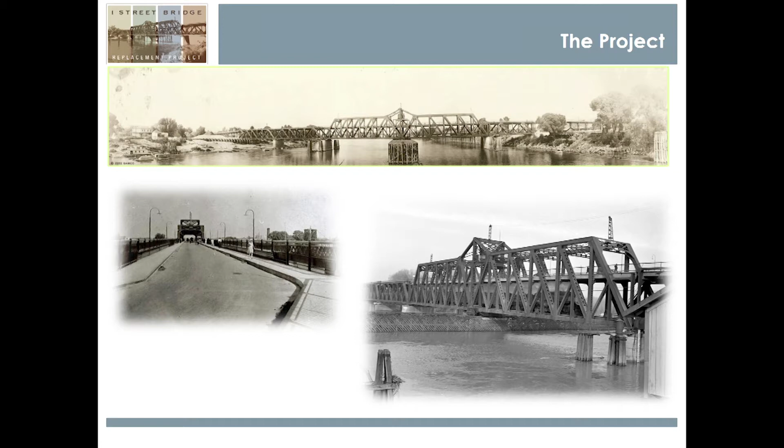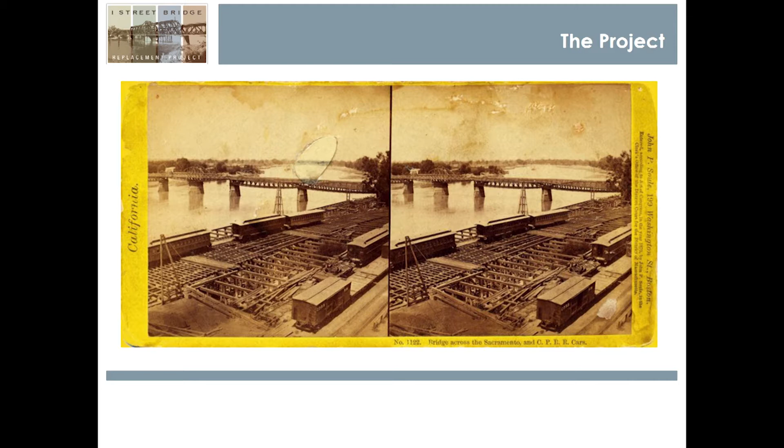But it's not the first bridge that was in that location. There were actually 2 bridges there before the one built in 1911, including a wood wagon bridge, and then later a double-decker wagon bridge and railroad bridge. So this will be the 4th bridge connecting Sacramento and West Sacramento in the vicinity.

However, we do not plan to replace the existing historic structure, and I will show you that information following this presentation. It's a separate project called the I Street Bridge Deck Conversion for Active Transportation Project, and I swear we'll have a better name for it in the future.

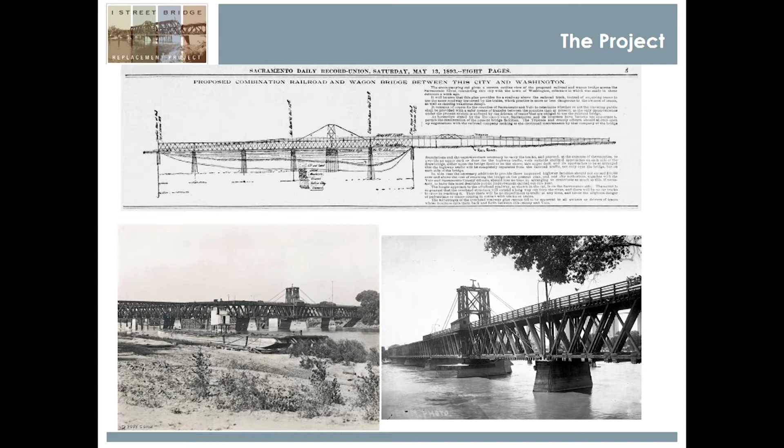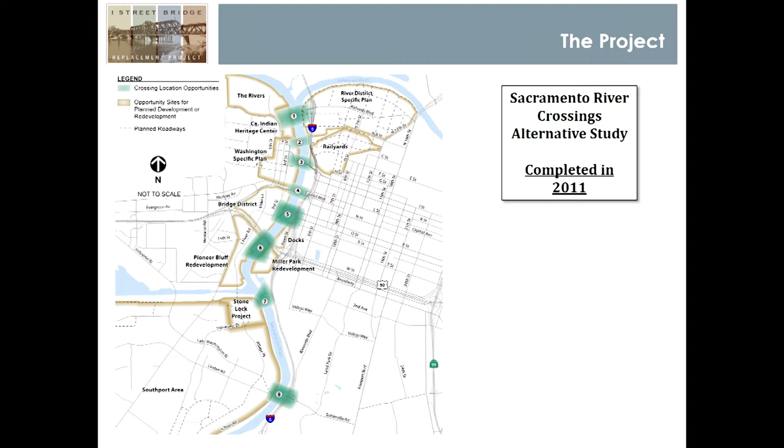So I'm going to back up a little bit, all the way back to 2011, when we had the Sacramento River Crossing study that looked at a number of locations—8 locations across the river in the urban core of Sacramento and West Sacramento. Most of these locations are actually planned to move forward with a bridge in one shape or another.

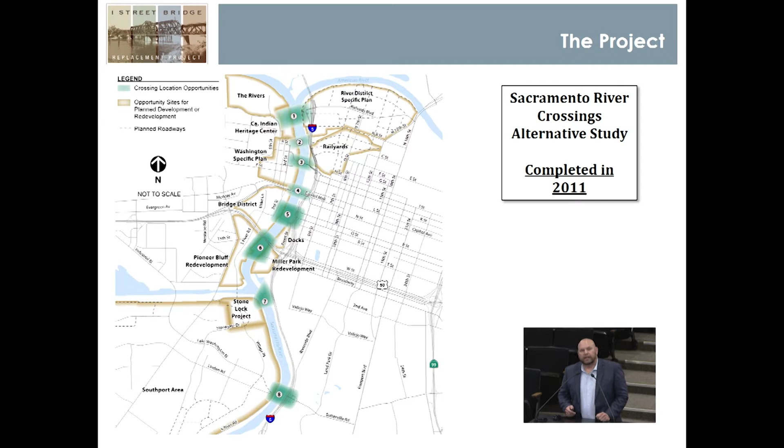The 2 that are moving forward right now, in the project approval and environmental document phases, are in the North Market area—that is the I Street Bridge Replacement Project, which will be constructed just north of the existing historic I Street Bridge.

The other bridge is in the South Market area, and that is the proposed Broadway Bridge, which is currently in the middle of having environmental data collection activities through the PAED phase.

Other bridges proposed to cross include what's shown as number 5 on the slide here, which is the future R Street Pedestrian Bridge. That is a conceptual bridge anticipated to be led by the City of Sacramento in the future.

Also in the area of number 7, between Miller Park and Stone Lock, is a proposed bridge which is currently identified in the planning efforts for the West Broadway specific plan. That, I believe, is still moving forward, and the environmental document phase is going to be kicking off relatively soon for that project, led by Sacramento.

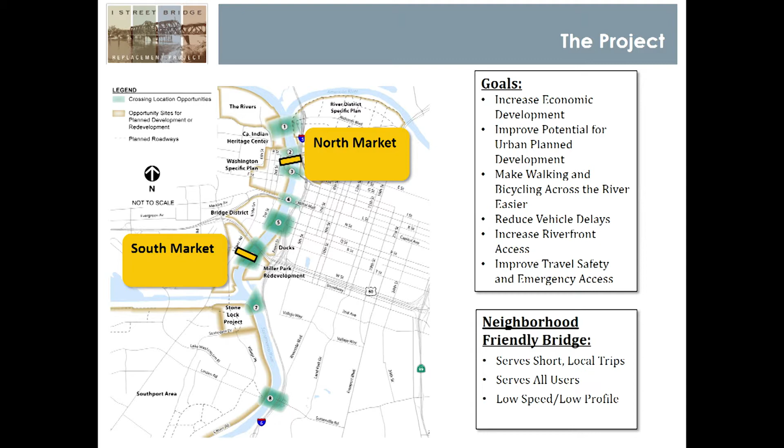This is the location of the project, off the geometric approval drawings. Interstate 5 is shown going north-south on the east side of the river. On the west side of the river is the Washington neighborhood, the oldest neighborhood in West Sacramento. It connects C Street in West Sacramento to Railyards Boulevard, which is already constructed.

This was actually identified in the environmental process very early on, and we have been following that throughout the progress of the environmental document.

So why a movable bridge? I did identify that this is navigable waters. We had a number of things that we were looking at when identifying the location of the bridge, as well as the width of the bridge itself. That includes the confluence of the American River with the Sacramento River, which actually has some reverse currents and some issues when it comes to navigating the waterway.

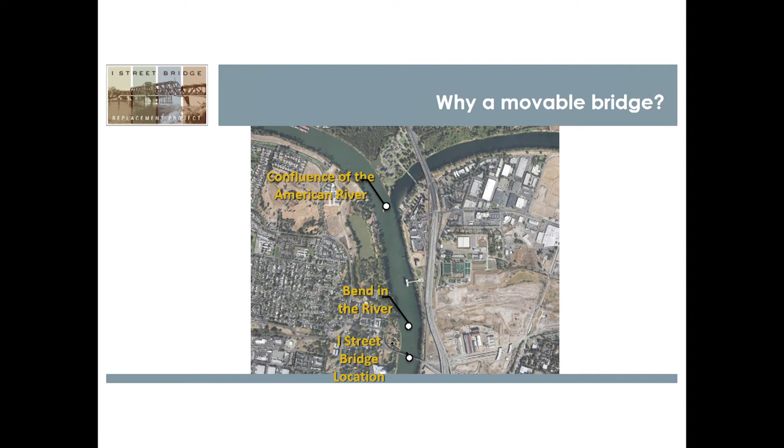Because of that, it required a wider bridge span, wider than the Tower Bridge itself. Barges have to be able to navigate through there, so we worked with the U.S. Coast Guard to drop buoys, brought out a barge, and had them go through several times to identify what the total span of the bridge would be. We also have the water intake tower that's already existing there, as well as the bend in the river and the existing historic I Street Bridge. So all of these things had to be taken into consideration when siting the bridge, the width of the bridge, and the characteristics of the bridge.

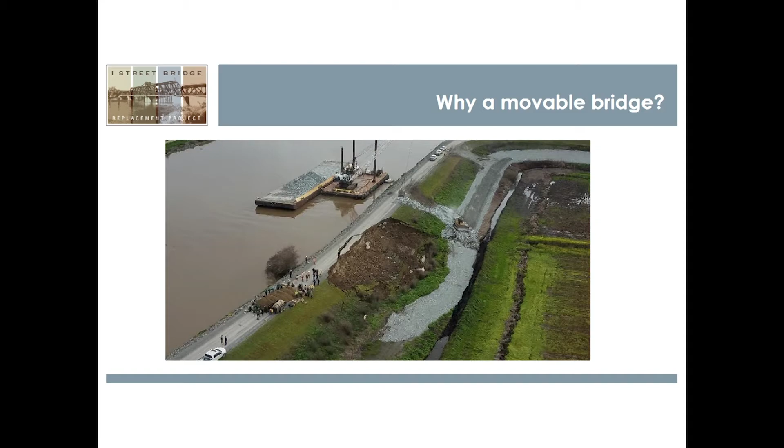This cross-section also enables us in the future to take a look at the lane configuration if absolutely necessary. Since our traffic models only go out roughly 30 to 50 years, but these bridges last 100-plus years, we don't know what traffic conditions will be like in, say, 75 years. So one of the things FHWA, the Federal Highway Administration, asks us to do is build in resiliency to our transportation system and infrastructure, meaning this could go from a 2-lane configuration to a 4-lane configuration if needed.

In order to accommodate pedestrians and bicyclists, we have 12-foot wide pathways on the outside of the deck shown there, so bicycles and pedestrians can access both in-road and outside of the bridge trusses. This is a great opportunity to connect the multi-use pathways that exist in Sacramento and West Sacramento, providing unfettered access between the two cities across the river, two cities, two counties.

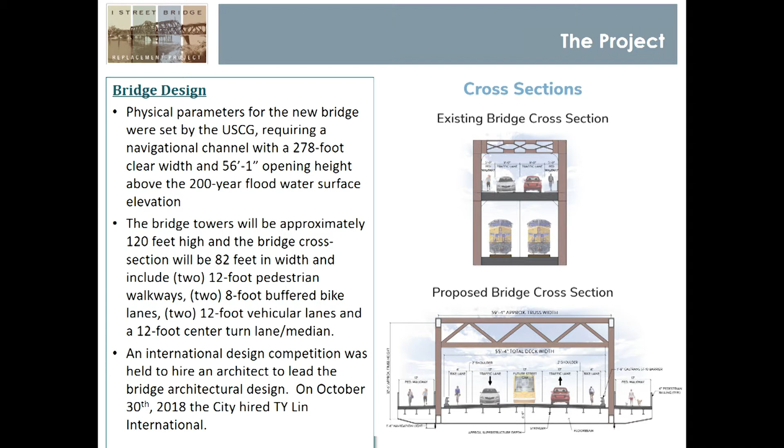One thing that should be noted is that an international design competition was held for this project. Originally, the project team consisted of Mark Thomas as well as Don MacDonald, the architect who was the bridge architect for the Bay Bridge and several other bridges. However, it was requested by members of the public that a broader, more international design competition be held, so that's exactly what happened. We paused the project, and over the past 6 months and the next 6 months we continue to look at different architectural types. We held the competition and selected T.Y. Lin International as the architects now on the project team.

A lot has happened since we last presented to the Environmental Commission. We now have an approved, certified EIR, which was certified by the City of Sacramento on June 25th, 2019. We actually received our FONSI prior to the meeting, because both cities had the EIR scheduled for approvals on their agendas, so Caltrans went ahead and signed the documents necessary to move us forward. That's a very good sign, because it shows there's a lot of political will to move this project forward.

West Sacramento is going to be taking the environmental document and our NOD, Notice of Determination, on the 7th. That will finalize the entire environmental process, with the exception of permitting, which is going to continue all the way through 2020.

We have a draft EIR for this project. We had a 45-day review period from September 28, 2017 through November 12, 2017, and received a number of different comments on the environmental document. All of those comments were reviewed, responded to, and published in our final EIR. That went to the City Council in Sacramento with no public comment on the final EIR.

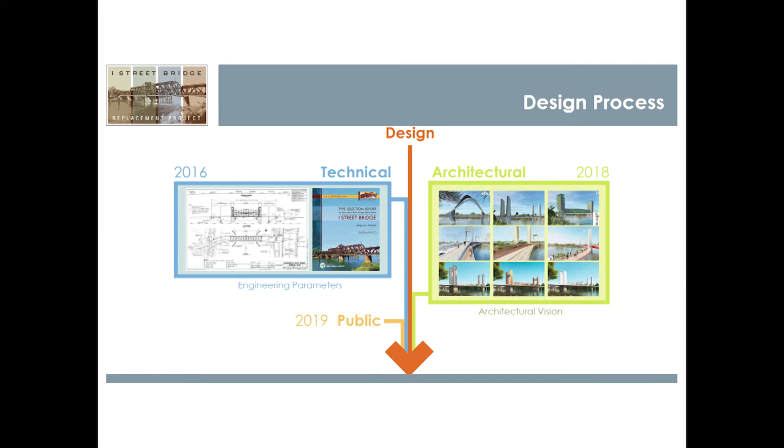At the same time, we also have technical requirements for the bridge. It must be a vertical lift bridge because of the large span. Various approaches have to connect both cities between C Street in West Sacramento and the rail yards over in Sacramento. So we're trying to blend the engineering requirements with the architectural design desires that the community has.

So far we've had 2 meetings, and the 3rd community workshop is kicking off at the end of September, beginning of October. We'll bring it down to hopefully just 2 concepts that the public can take a look at and either choose from, or we come up with new concepts based on the comments. We're leaving this relatively fluid. We're not asking people to pick this one or this one, we're just asking what they like about each one so we can find a design that meets the needs of everybody. Difficult to do, but we're trying.

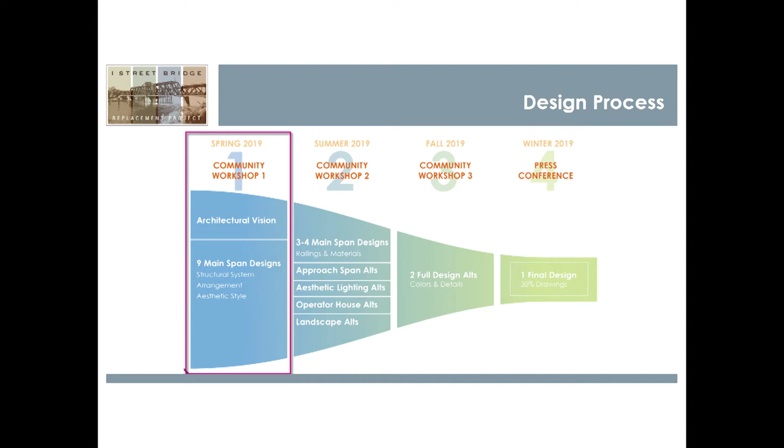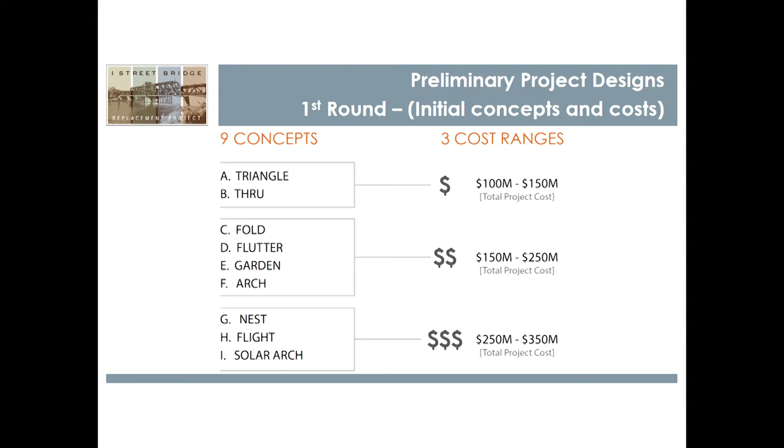The cost of the project is a constraint. These have since been narrowed down, and I'll show you the 4 design concepts narrowed down from the 9. These were the initial 9, and the cost ranged from $100 million to $350 million. As I said, those have since been updated.

These were the initial 9 concepts. Just going to move on.

From those 9 concepts, in our community meeting we received a broad range of feedback from folks. We asked them things like, would you prefer the design style be simple and streamlined or more spirited and elaborate? It went all over the board, really, but we did find a lot of folks wanted to see a little bit more of a simplified design, but with some flourishes. That's also represented in the verbal and written comments we received. So we've been following that feedback.

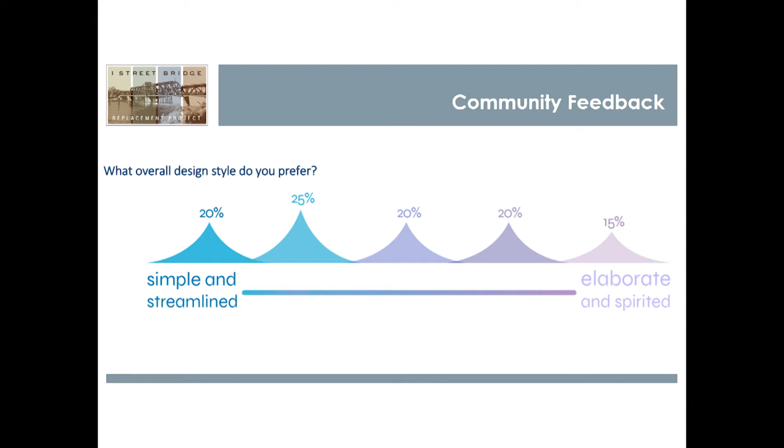We also asked how people were going to use the bridge, and overwhelmingly folks wanted to go toward the goals of opening up the waterfront, more recreational activity, and more walking and biking along the river.

We also asked in the first meeting, which, by the way, we had both an in-person presentation and workshop, and we also did a virtual online workshop. That was extended for over a week, almost 2 weeks, so folks could get online and submit feedback directly, and all of that was recorded.

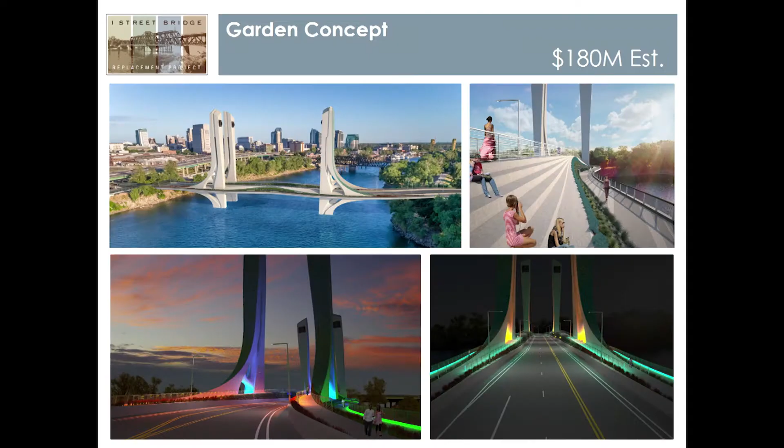Here's the 4 concepts. This is the garden concept. All of these were further refined based on public feedback and then brought forward. The garden concept is supposed to represent the waterfront nature, more vegetation, more sustainable features, by bringing plant life in to connect the 2 cities. There's a lot of interesting detail in how the architect did the pathways—they're more meandering, giving more of a garden-like appearance, hence the name.

The concept was refined to about $180 million estimated price range. These are all subject to changing as the architecture changes with more comments received.

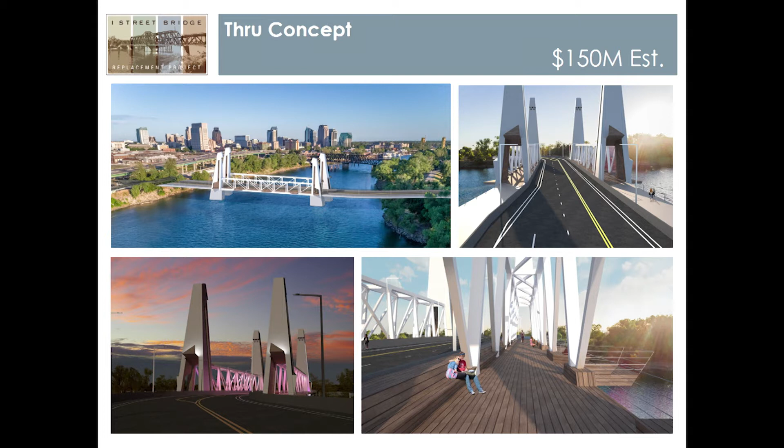The through concept is on the lower end of the spectrum as far as cost. It had more of the concept that a lot of people said they wanted—respect to the existing bridges, more of the historic nature reflected in the new bridge, while also wanting a modern appearance. A lot of people brought up the idea of Art Deco style, but also bringing in natural elements, so the architect pulled these comments together to create this concept.

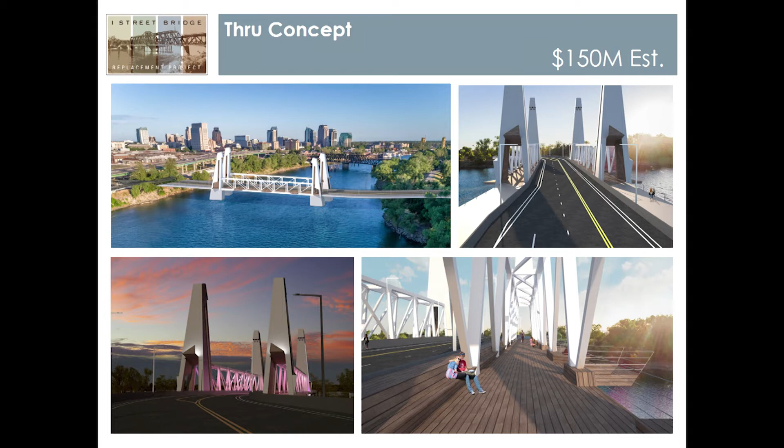All of these bridges generally follow the same required width of the bridge span, and the approaches really aren't dealt with until later on, once we get a little more finalized in the concepts.

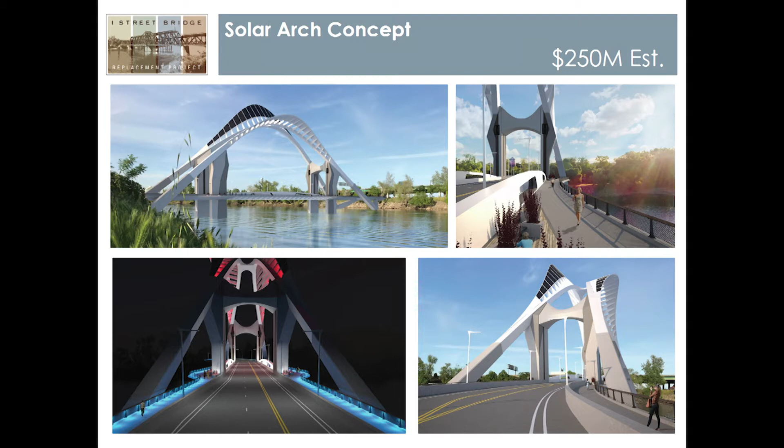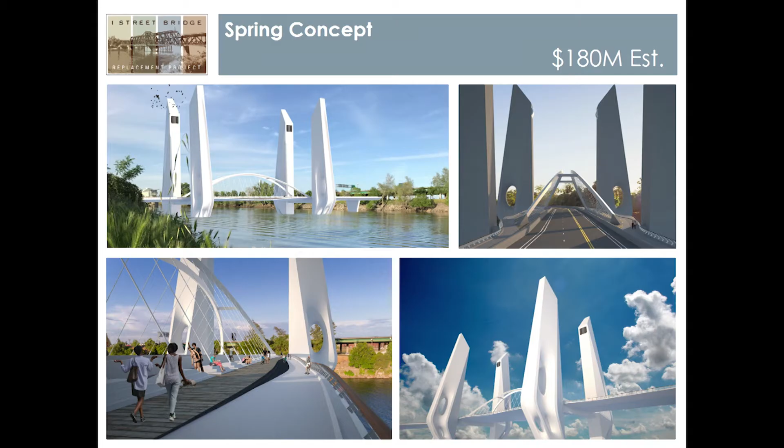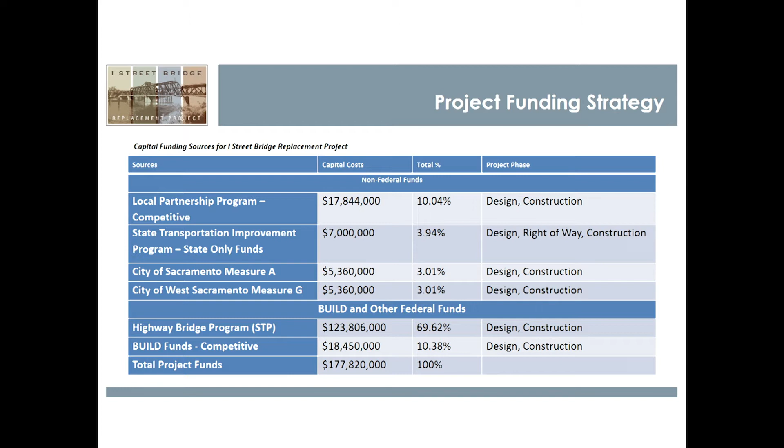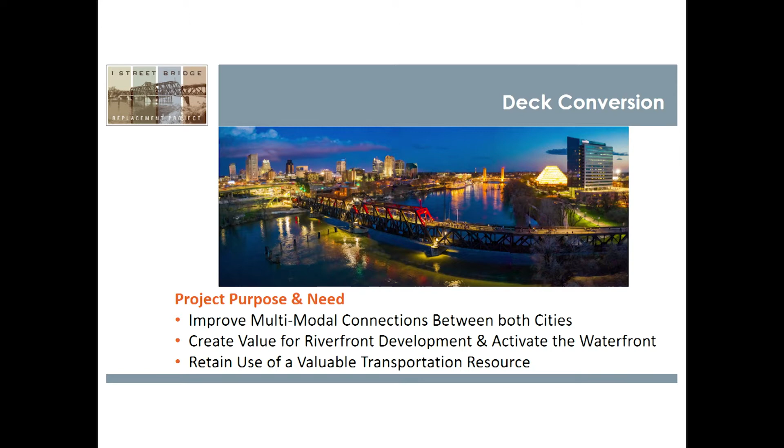So in order to retain use of the bridge, we want to keep using it. So what we developed is a plan through the feasibility study to look at how we can keep the top deck for pedestrian use. And we double checked what highway use meant. Does it mean vehicles? Does it mean what it means today? That's bicycles, pedestrians, anybody using a roadway.

It is the opinion of all involved that as long as we keep this for bicycles and pedestrians, we can continue to use the top deck of the bridge. So that being said, we decided to have an outreach meeting organized by the city of West Sacramento to see what it was like to use the bridge vehicle-free.

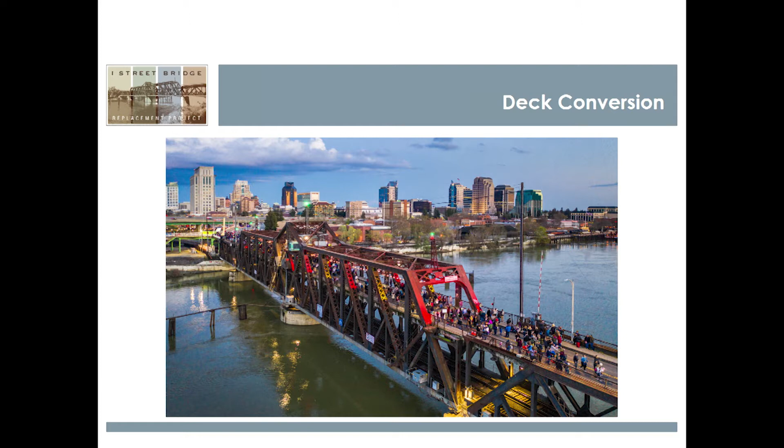This was the Lantern Festival that was put on. Hopefully some of you were able to attend. A little over 3,000 people attended the event. It was pretty magical—we had not been on the bridge before when there weren't any vehicles. It was a lot of fun, and I think it actually produced a lot of support for the project. We even had food trucks out there and a band, so it was definitely a lot of fun.

Now we're going to move into the next phase, the PA&ED, Project Approval and Environmental Document phase. This will require reusing some of the environmental work that was done for the existing I Street Bridge replacement project. Thankfully, there was a lot of work done there.

We also have mitigation for the replacement project that requires the approach ramps stay up on the Sacramento side for a period of two years, to allow for purple martin and bat habitats to move to areas developed specifically for them, including some bat boxes and purple martin habitat installed underneath the existing bridge approaches, and weep holes that will be created in the new bridge suitable for purple martin and bats.

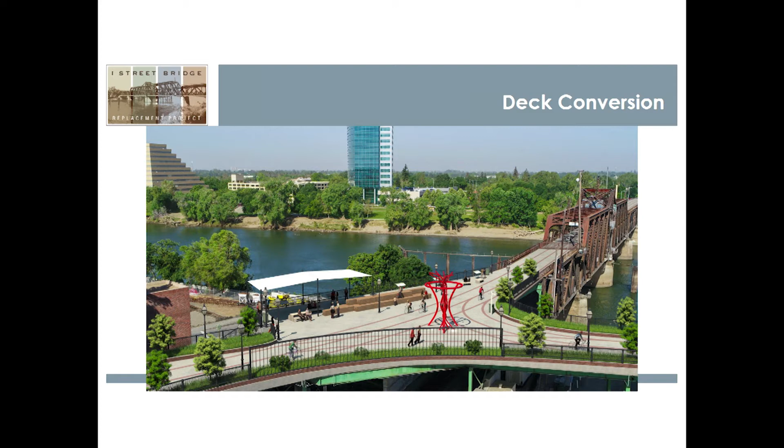This is an example of how we could use the existing infrastructure to create a plaza on the Sacramento side. This was part of some of the concepts and renderings developed for the project. As I said, though, there will be a vast number of designs moving forward for review on both sides of the river, and eventually the design that moves forward and is environmentally cleared hopefully will be constructed.

A lot of people ask, well, if you're building a new bridge, why do you need this other one? One, it's a historic resource and an asset to the city—a lot of people identify these historic bridges, the Tower Bridge and the I Street Bridge, as elements of the city that reflect our culture. So what we'd like to do is maintain that. It also provides a unique connection between Old Town, the oldest neighborhood in Sacramento, and the oldest neighborhood in West Sacramento. So it keeps that connection going, and hopefully will continue to spur economic development, interest, and use.

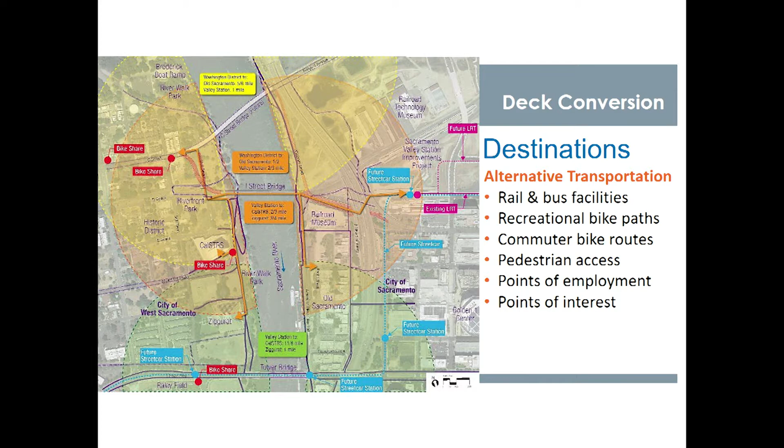If you have any questions, I'm happy to answer them.

That was an excellent presentation, Jason, and very comprehensive. Is there any questions from the commissioners at this point? Diana.

There we go. Thank you so much for the presentation, we appreciate it very much. I think I remember the first one. So a couple of questions. My first question is, what types of comments were received on the EIR? Were they abundant? Were there any hostile? Are you expecting any challenges? That's my first set of questions.

So I believe we had about 38 written comments. Not very many. We're either doing something amazing or people are reserving comment for later on. I believe we're answering people's comments in earnest and thoroughly. A lot of the comments had to do with the bat habitats and purple martin, primarily because there aren't that many purple martin habitats. They aren't an endangered or listed species, but they are one of concern for the neighborhood, so we tried to be respectful and respond to that appropriately.

A lot of the comments had to do with, well, what are you going to do with the existing bridge, and we're addressing that. There are ongoing comments I think we've had with regard to right-of-way acquisitions, which now that we're moving into the next phase in the federal process, once the environmental document has been certified, we can move forward with the right-of-way agent and start making discussions with regard to that. Those are pretty standard comments.

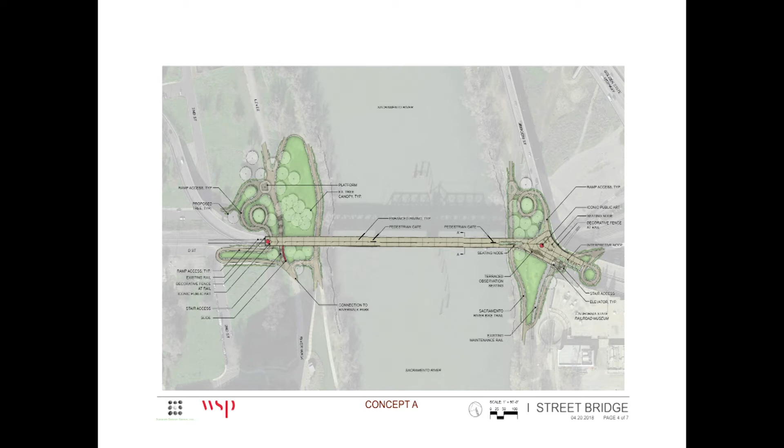I believe for the concept that I showed you, which I'll go back to here, this concept shown here is roughly $13 million for the whole project. But this could be done in phases, as I said, the first $4 million, and then go back a little bit later. It's going to depend on how much funding the cities are able to obtain for this project, and how quickly we can move forward to make sure that we're not vacating our right to use the upper deck of the bridge.

I had one question, Jason. On C Street, on the West Sacramento side, does the project area extend down C Street, including any infrastructure requirements to improve C Street? It does. So bear with me, and I'll go back just a little bit to our original plan here.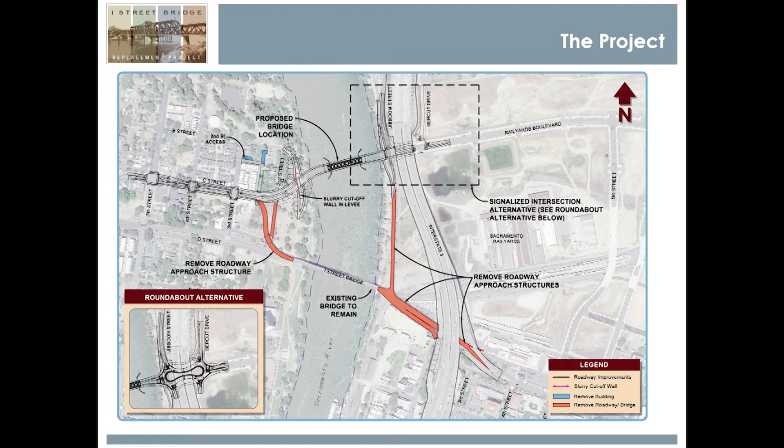So I assume the environmental document did address the growth-inducing aspects of the bridge on C Street and the other requirements for infrastructure improvements. Everything was identified in the document.

How come the project area didn't extend on the Sacramento side, eastward? So Railyards Boulevard was already constructed. There have been two alternatives that move forward for the connection, shown on that exhibit.

There's a roundabout alternative, which actually reduces the traffic impacts to LOS C in the future condition, versus I believe it's LOS D with the condition out there now. However, it still falls within the general plan requirements for traffic conditions.

It also, as designed, meets the needs for West Sacramento as well, provided that we're able to put in the improvements that need to be done for the project.

Okay, very good. Eric, do you have a question? On a regional scale, does this project reduce vehicle miles traveled, keep it about the same, or is there a significant change overall?

So the way that we designed this, we looked at different bridge widths, a six-lane bridge configuration early on. I think we presented some of this at our first meeting with the Environmental Commission, where we looked at everything from two-lane to six-lane.

Once you start getting into a six-lane bridge, it starts becoming a growth-inducing project. You start getting people using that instead of I-80 to cut through to I-5, and our traffic analysis actually reduced the level of service to F+20.

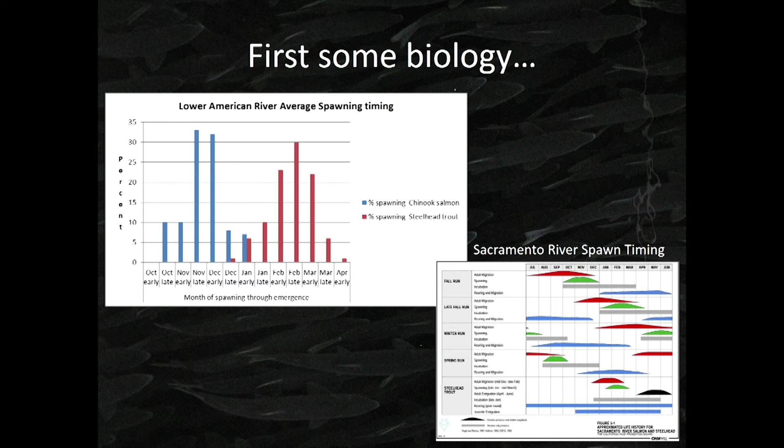One of our mandates is to try to increase the natural production of fish in the river, meaning fish that spawn in the river, not the ones produced in the hatchery. In 2008, we started a project marking 25% of the Chinook salmon from the hatchery. Prior to that, we thought maybe 40% of the fish in the river were from the hatchery. What we've learned is that the tagged fish come back and we read the tags.

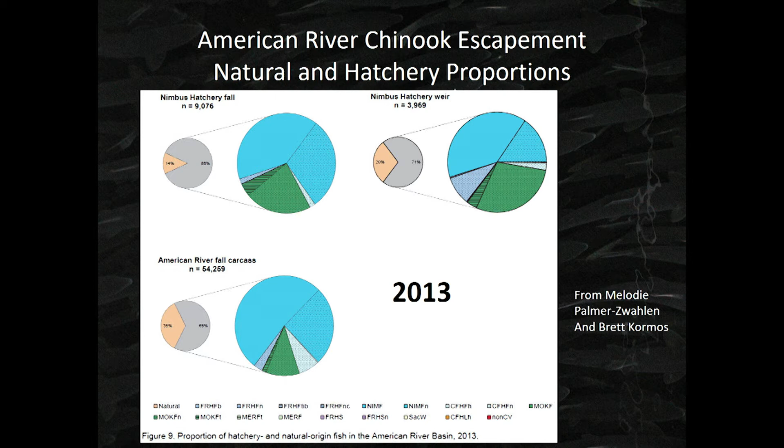So our goal is to increase that proportion of fish spawning in the river. In 2013, similar kind of thing, still around two-thirds hatchery produced fish. 2012 similar, 2011 similar kind of deal. The different colors on the larger circles represent different sources of fish - the different shades of blue are all fish from the American River, while the other colors are fish that came from other rivers into the American River.

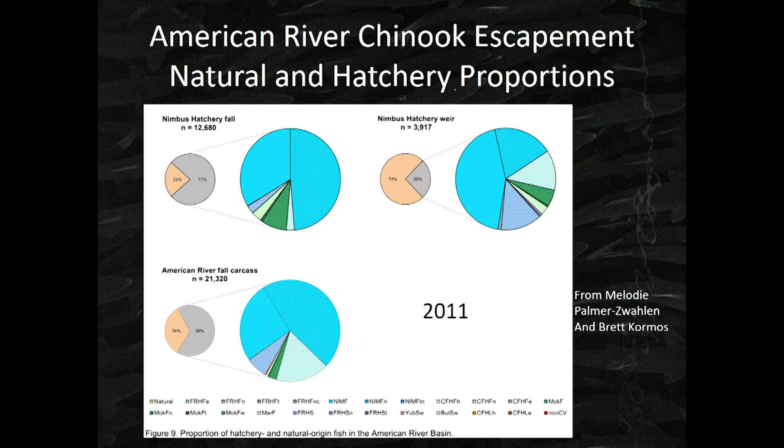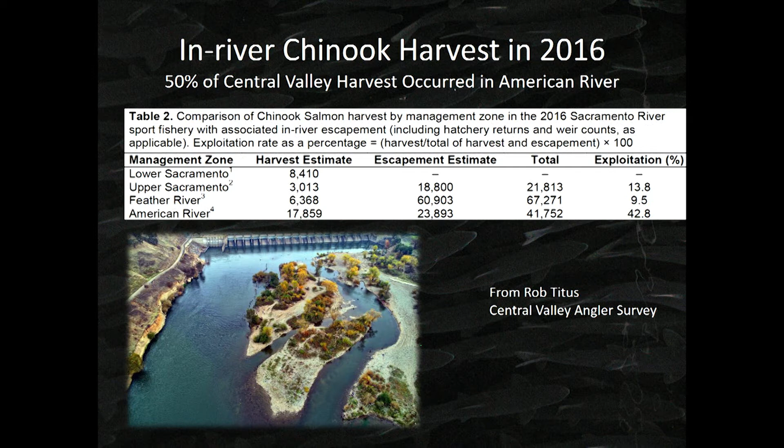That exploitation rate, on the right-hand side, about 42% that year of the salmon returning to the river were harvested, and a large proportion of those were harvested right below Nimbus Dam, where fishing was open in November and December. It's not open anymore up in there.

Another study going on right now by Anna Sturrock at UC Davis and Cramer Fish Sciences is working on this. They look at the otoliths of the Chinook, the ear bone, and can look at the strontium isotopes to figure out where the fish originated. So they go and get the otoliths from the adult fish.

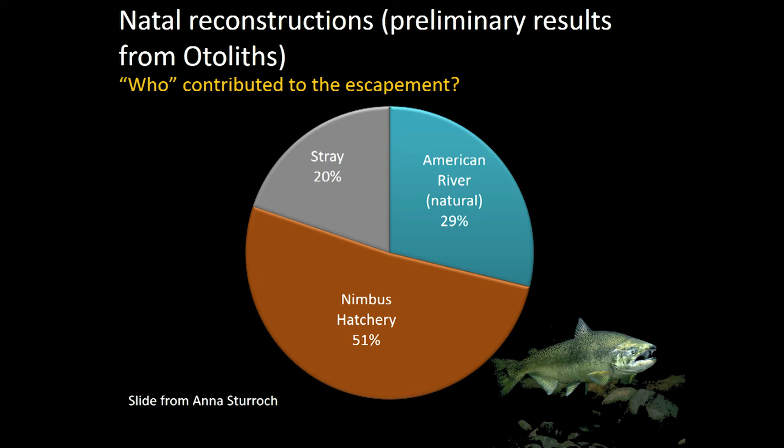This is a really interesting part of the study. They can use the strontium in the otoliths to figure out when fish left the river. That helps us determine what types of habitats are most limiting, and what kind of restoration projects could be most successful. Originally we thought the bigger fish, the ones that stayed in the river longer, were the ones that would survive to adults and come back to contribute to escapement.

But we learned through this that only about 5% of those really large fish returned. Along the bottom axis is the length of the fish in millimeters, so like 0 to 4 inches is basically that scale right there. We used to think that over 3/4 of the fish coming back as adults were probably smolts when they went out as juveniles.

We've learned through this study that a lot of the fry, the really small fish, we used to think didn't contribute at all. We learned that 35% this year of the adults that came back went out as juveniles as fry, and the medium-sized fish, the parr, about 60% went out at that size.

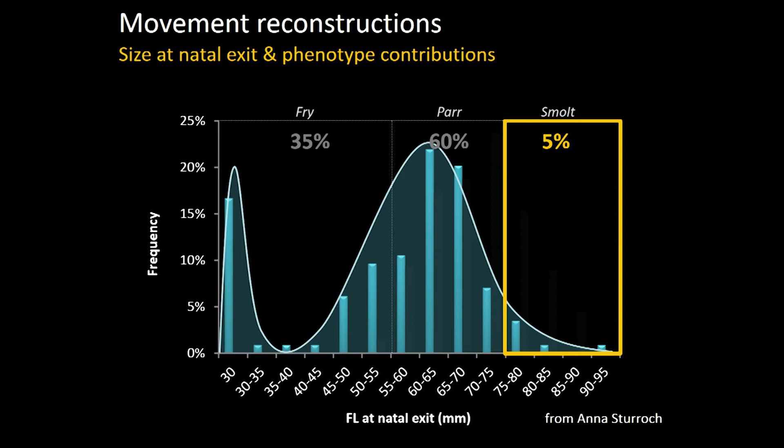So that helps us determine what types of habitats to focus on in the river if we want to increase natural production.

This is my pet project—I came to the American River in 2001. Steelhead are a species that don't die after they spawn, so figuring out how to estimate the populations is kind of a difficult question.

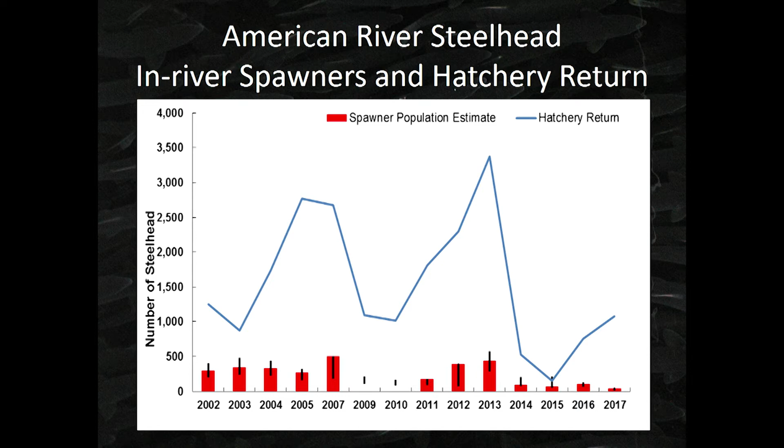Water temperatures are kind of an issue in steelhead survival.

One issue with steelhead is back when Folsom Dam and Nimbus Hatchery were built, there weren't enough fish coming back to the river for the hatchery to get enough fish to produce fish. Basically, very few came back. So they brought fish over from the Eel River.

They didn't know as much about genetics back in those days, and basically replaced the steelhead stock in the American River with fish from the Eel River. So those fish right now, steelhead are a threatened population in the American River under the Endangered Species Act. So the hatchery population doesn't actually contribute to recovery of the native stock. So we're working on an alternative brood stock or different source of fish to use to raise in the hatchery, to try to replace that Eel River stock with a stock that's more compatible with the Endangered Species Act and would count towards recovery.

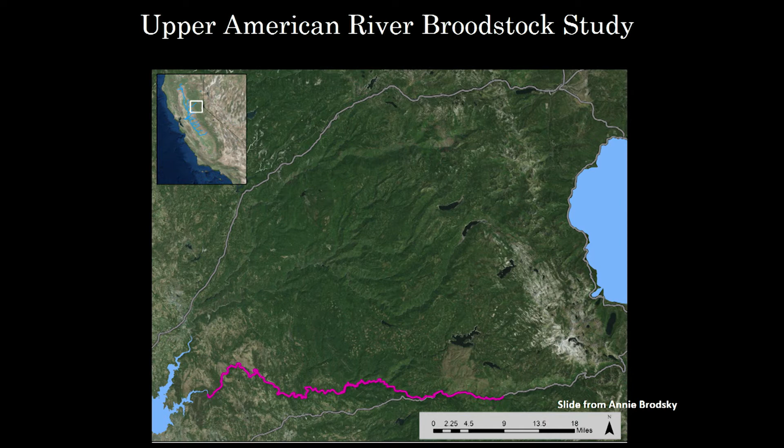So this is the Upper American River watershed, I-80 at the top and Highway 50 at the bottom, the three forks of the American River. We went out, Cramer Fish Sciences did this study, collected about 500 rainbow trout upstream of Folsom Reservoir in these tributaries, and did genetics on those fish.

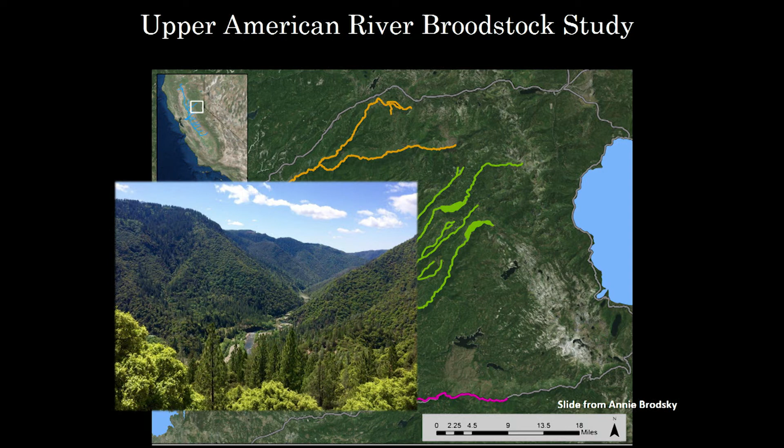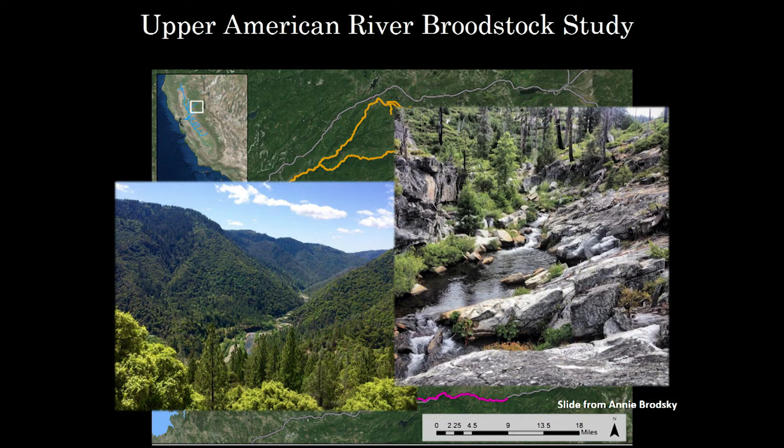It's pretty rough country up in there, beautiful country. Middle Fork there, and I think that other slide is up near French Meadows Reservoir. But we collected 500 genetic samples from rainbow trout, basically to see if fish upstream of Folsom still have some native genetics that could be used as steelhead, because rainbow trout can go to the ocean or not go to the ocean, and that determines whether they're steelhead or not, but they're the same species.

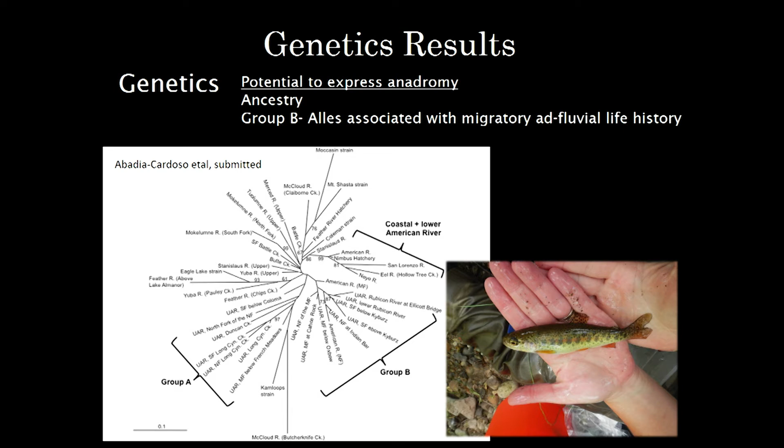Originally we thought that there's been a ton of hatchery stocking, and it would be mostly hatchery stocks up there. But we learned that actually the native stocks are largely still up there. The Groups A and Group B have alleles associated with anadromy, so they could, if given the chance, potentially go to the ocean and become steelhead.

So we're still working through this study. Another part of it, we brought steelhead down from Coleman Hatchery up Battle Creek off the Sacramento River, reared them along with Nimbus Hatchery fish in Nimbus Hatchery, and then compared the performance of those two groups of fish. They were almost identical as far as survival and growth rates.

So we combined the two groups, did an acoustic tag tracking study, tracked the juveniles out to the Golden Gate Bridge, had really good survival. That indicated that we could probably use Coleman Hatchery fish as a stock to replace the Nimbus brood stock as well.

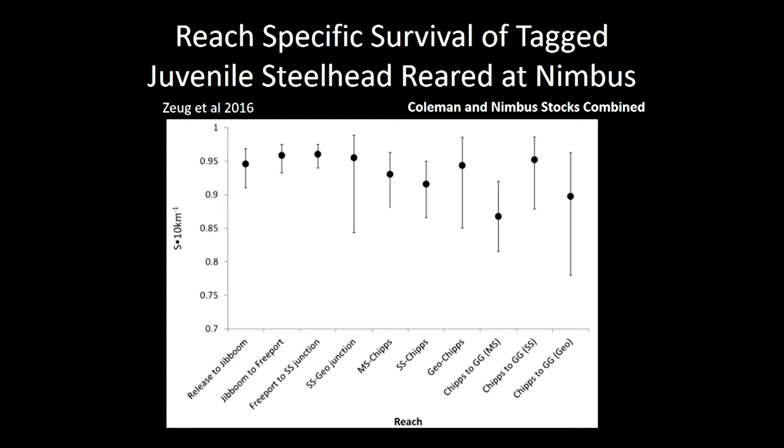But there's still some pathology issues to work through on this study before we finish it off.

Next steps with the fish from above the reservoir: put some below the reservoir, see if they can become anadromous or go to the ocean. Do tests with salt water, see how they do in salt water. And then out-migration studies with the fish above Folsom, same as we did with the fish from Coleman Hatchery, to see if they'll become anadromous and return at a sufficient rate to replace the stock.

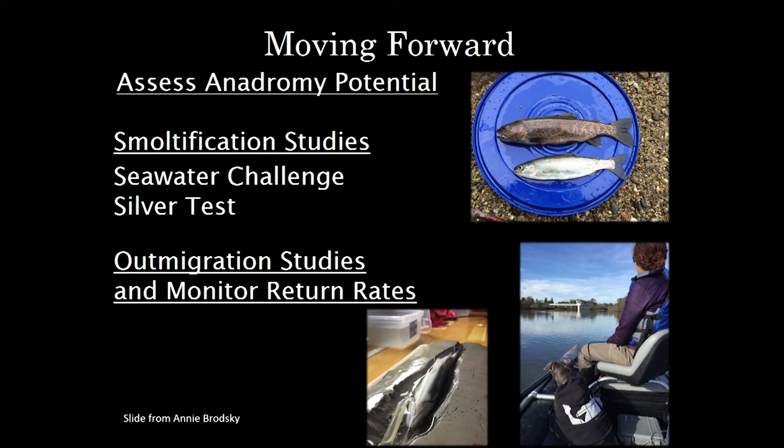Right now we've got some pathology concerns with moving fish around, so we're kind of on hold while we work through those pathology concerns.

So that's basically the biology part. Now I'm going to go into the habitat restoration part of the talk, or kind of the physical habitat part.

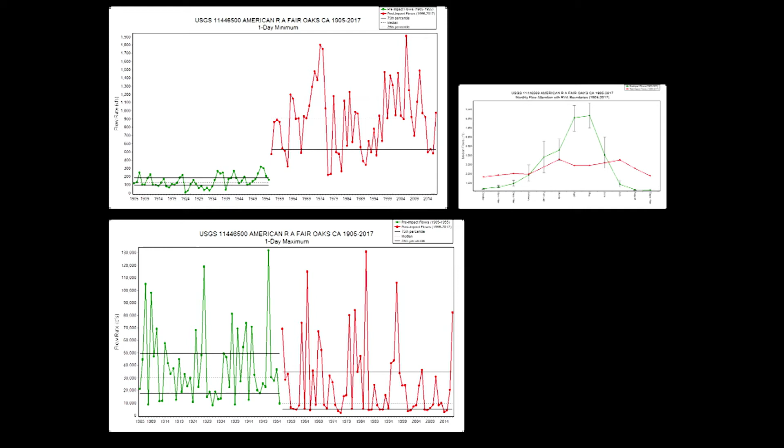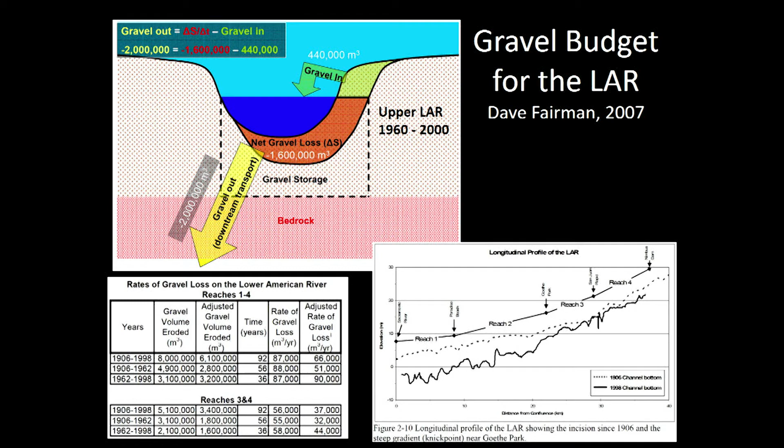You can see it's downcut 10, 15, 20 meters, something like that in the lower river there, where it's below sea level now. I think some of that may have been dredging, but you can see it goes all the way up to Nimbus Dam where the channel is downcut. And what's happened is it downcuts and the river gets separated from the floodplain, side channels get cut off and dried out, and it simplifies the habitat, so the salmon don't do as well.

So our projects focus mainly on moving gravel around, putting gravel in the river. The gravel provides spawning habitat - fish, of course, lay their eggs in the gravel. It provides rearing habitat by creating pools and riffles, diverse flows. And aquatic insects reproduce on the gravel, which provides food for salmonids and other species.

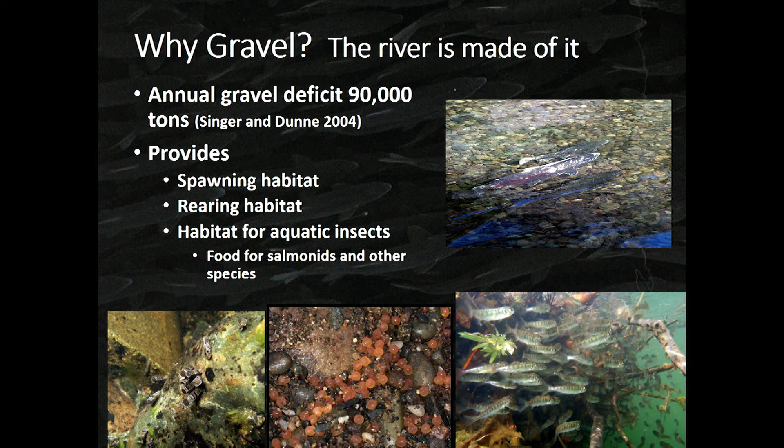Okay, so one of our challenges has been addressing flood concerns with the Army Corps, the Section 408 process, which deals with modification of a flood system. So the entire American River has been classified by the Army Corps as subject to Section 408, so we've been working through that. We haven't had a project for the last 2 years as we work through this process, but looking at changes in water surface elevations, the Sacramento Area Flood Control Agency has really helped us out with this.

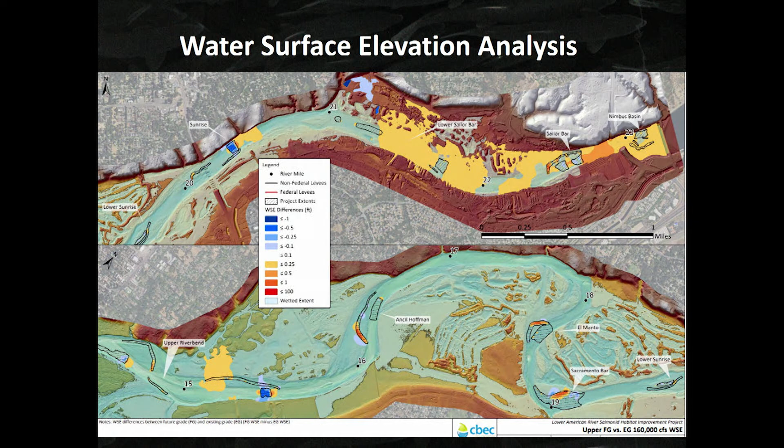The top panel is the upper half of our project reach, and the bottom panel is the lower half. You can see a little bit of an increase on the upstream side. This is going through the Army Corps and the Central Valley Flood Protection Board right now to see if they'll approve our project. We've been working through this for a long time.

This is the lower part of the river, the leveed reach, which is the higher concern area as far as flooding. In the levees, not much change down in that area. We've kept our projects upstream of here.

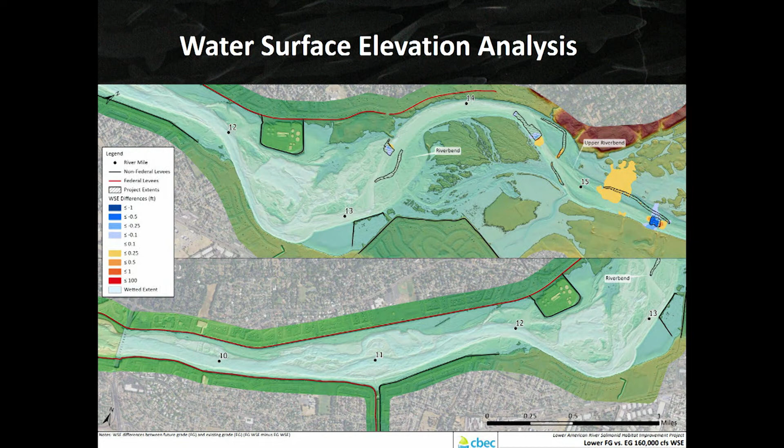So what we do is go in, excavate the gravel—mostly gravel, river rock—dig it out, make a side channel so water would flow through there all the time, run that gravel through a gravel sorter, and then put spawning-sized gravel back in the river at those two polygons in the main channel for spawning habitat, and put the larger rock in various places where we're trying to keep things stable.

We're hoping to start on this if we get all our permits in line from the flooding issue, addressed hopefully by mid-August, and we can do work this August and September at this site.

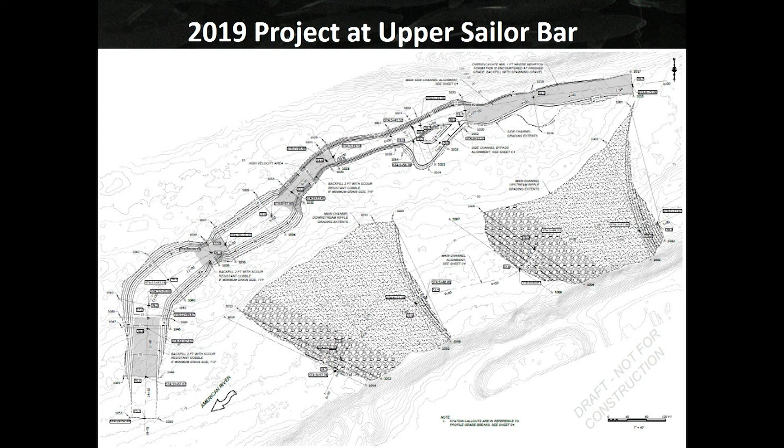So we do a two-dimensional hydrodynamic model for our design and try to maximize the amount of habitat that meets these criteria. We have the same kind of deal with rearing habitat for juvenile fish. They need slower water near the bank, so we try to maximize that, especially in the side channel that I showed.

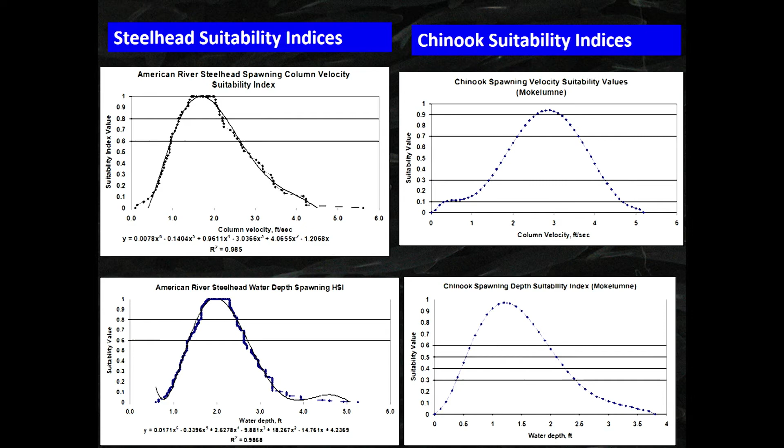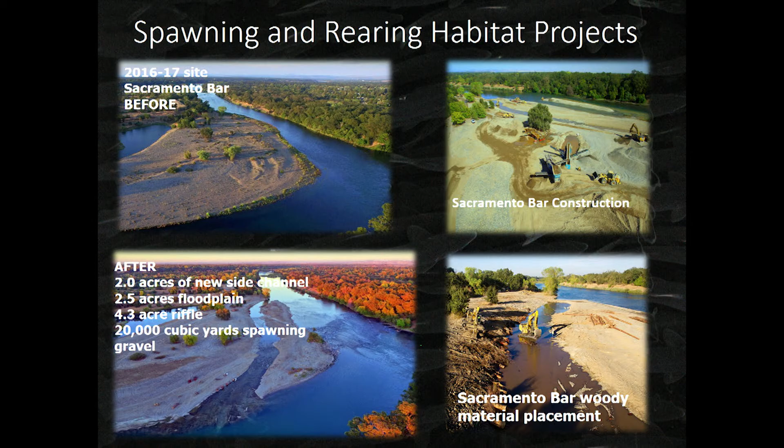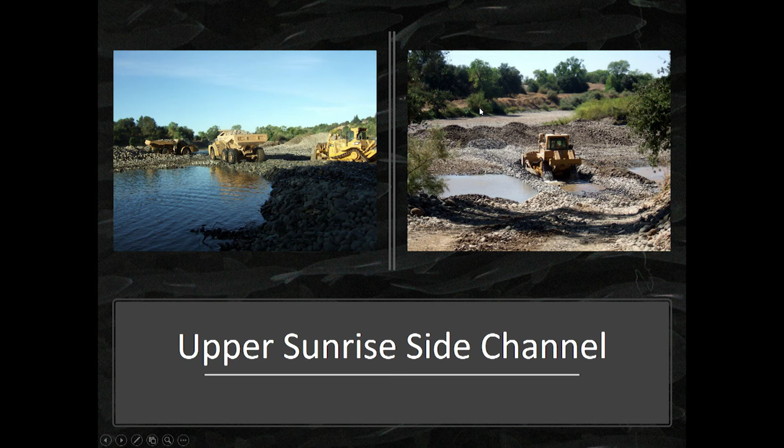So this is construction at that site. This is from the north, looking across the river, putting our larger material that we sorted from dredger tailings at this spot, to fill the main channel, divert water through that side channel, and rewater that habitat.

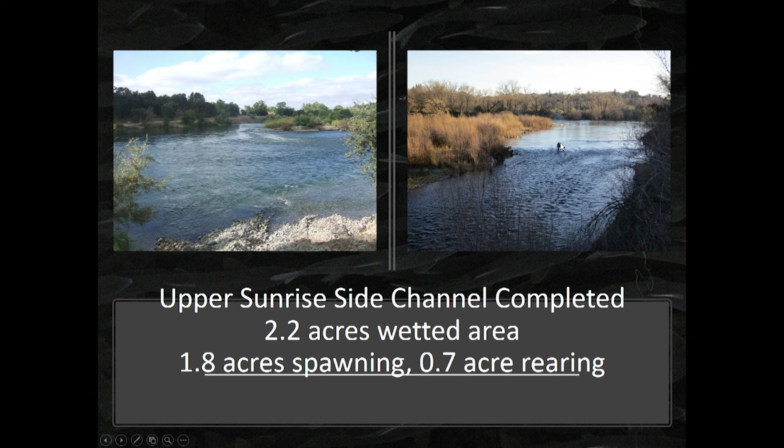This was after it's completed, looking across the river - side channels over there, main channel here, and then the side channel here has got water in it again. Steelhead are using it to spawn. Chinook are using it to spawn. A lot of juvenile fish are using it.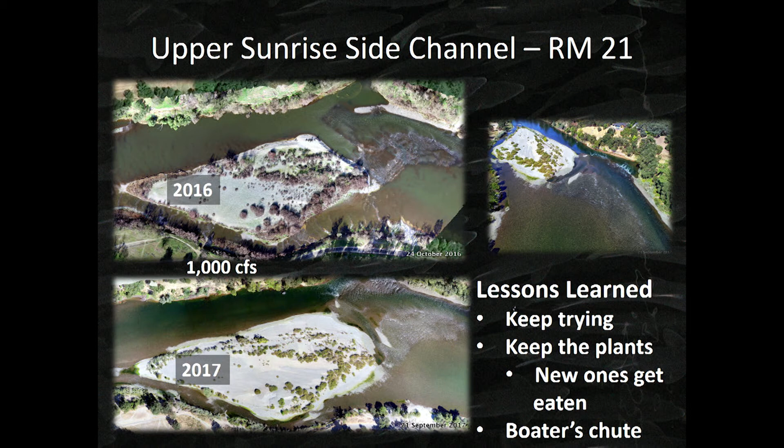Same thing again, except this is before and after the high flows we had in 2017, when we had 80,000 CFS. 2016 just before that, and then 2017 it moved things around a bit. This is at the lowest flow we had in 2017, but the side channel is still flowing. It may need some maintenance in the future, but it's still functioning the way we hoped it would.

With the American River, there's a lot of recreation use, public use. So we try to design all the projects to keep them safe for the public. We've done a lot of work with county parks on how we design projects. The wood we put in can be an issue for folks recreating out in the river. When we put large pieces of wood in there, it can be a safety hazard for people.

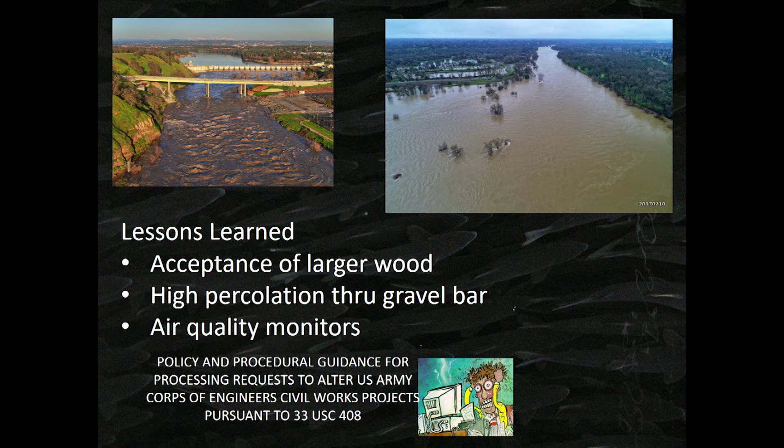The 408 process with the Army Corps of Engineers has been one of our biggest challenges in meeting over the last couple of years. And then this is that Sacramento Bar project before and after the high flows in 2017.

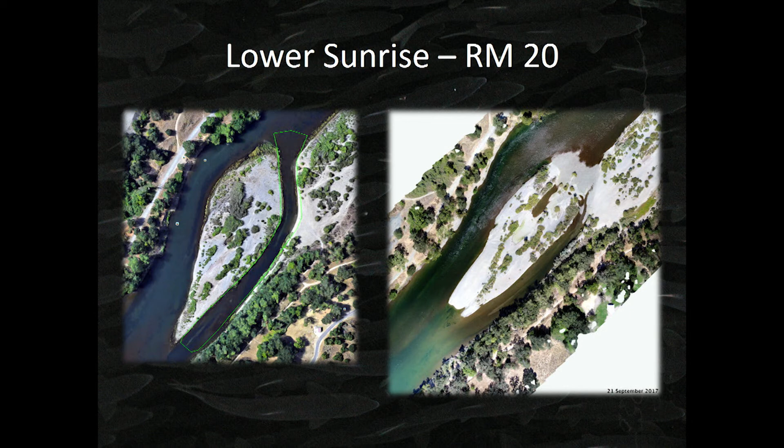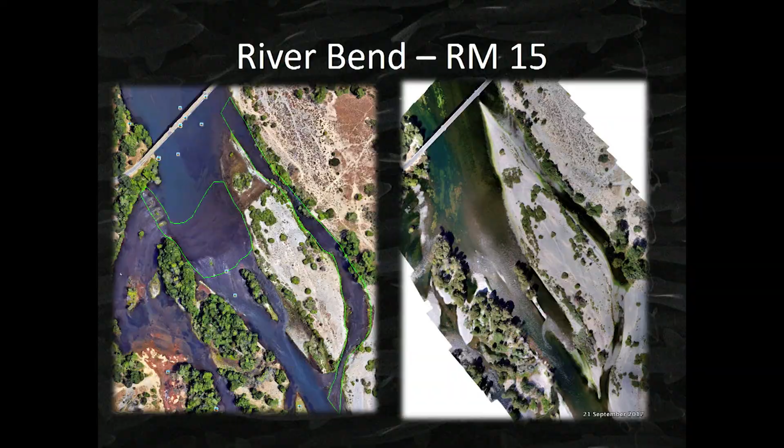Thanks, John. That was a good presentation, very in-depth and comprehensive of the whole issue. You mentioned there was like a 90,000 ton a year gravel deficit in the system - how much do these projects contribute to offsetting that deficit? So our average project is probably 15,000 tons.

So 15,000 versus 90,000. And do these projects last a decade, or do they eventually just get washed out? It depends - it's really site specific and dependent on the flow regime. With 2017, probably 3 of our sites need to be redone after those flows, but they were constructed back in 2008, so we got 10 years out of those. The other 5 sites are still pretty good - they made it through 80,000 CFS, which we were surprised they did a lot better than we thought they would.